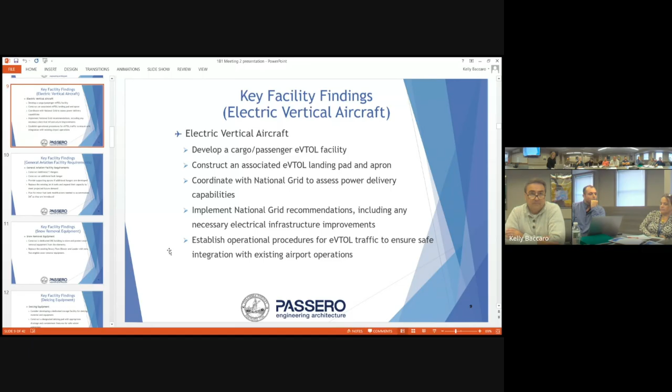Do you need me on the next screen? Yes, please, thank you. Additionally, we looked at the general aviation facility requirements. Although a forecast wasn't required for this master plan, we did a very high level forecast just to determine what type of general aviation facility would be needed in the near future.

Additionally, we talked with Ray, and it was determined that T hangars were needed, and same with box hangars, additional aprons for these T hangars, Jet A tanks, and minor fuel tank modifications needed for sustainable aviation fuels, which are also coming in the future. The sustainable aviation fuels, it's still kind of in the air as to what modifications would be needed. All the guidance provided right now just says that it would be very minor, but that's yet to come.

I just want to clarify for those who are not aviation folks: T hangars are the smaller, let's call it condominium type facilities where you have multiple tenants in one hangar. Usually they can be one-sided or they can be back to back, tail to tail, and that's called nested. A box hangar is just that — it's a bigger hangar, and that's where these larger jets would probably want to go. So just wanted to differentiate those two.

Thank you. And when we're talking about the fuel issues, currently general aviation is using 100 low lead. It still contains lead, and they're trying to get away from that. So there has been a program looking at alternative fuel supplies that still work for that general aviation, aging general aviation piston aircraft, because the piston aircraft requires or needs that lead currently. So they're trying to develop these alternative fuels to look towards the future.

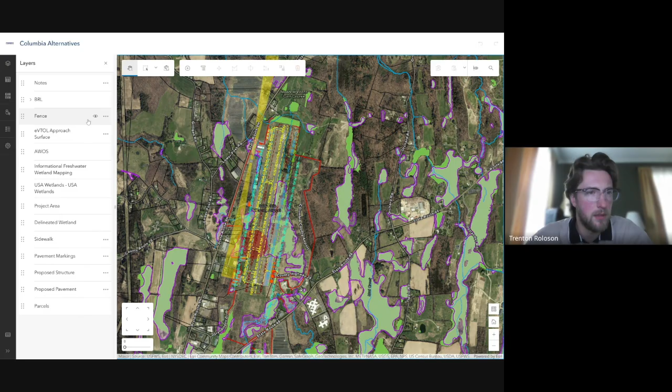There's something, there you go. We see yours. Okay, can you just explain to everybody what you're showing us before we start getting into all the alternatives?

Absolutely. So this is a web application I prepared in ArcGIS Online. Essentially, I've uploaded all the alternatives that we've drawn in for the master plan online to represent this in a more interactive map. While the static maps are really nice to look through and it's good to have them, it's cool to be able to see the environmental layers, overlay them, and turn them on and off as need be.

The nice part about this is we can actually actively edit things in real time as well. So if everyone here made a suggestion about one of these buildings, I can click on this and make adjustments to it as need be. Another thing we can do is put attributes about its information in here as well. So that's ultimately what this is.

I'll pan and move through this and flip layers on and off as need be. I've included things such as the DEC's regulatory wetlands, the U.S. Fish and Wildlife's wetland system, and wetlands that have been delineated in the nearby area, as well as everything from the alternatives. So with that, whatever you guys let me know, I'll just move around the map and flip things on and off as you request.

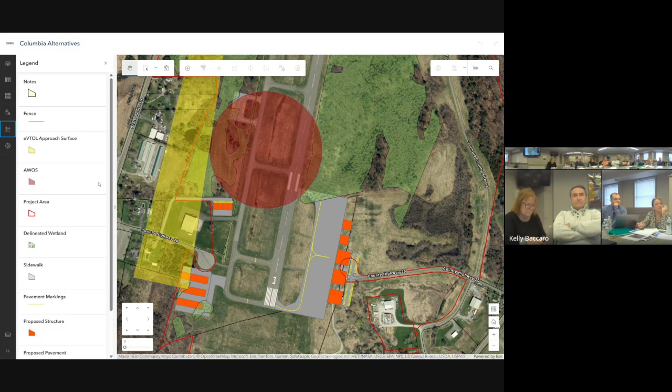So Trent, we're going to start with the T hangers. Could you just turn everything else off except the T hangers? Yes, I can flip all the other layers off. They're tied to the proposed structures, so I have to leave the other structures on as well though.

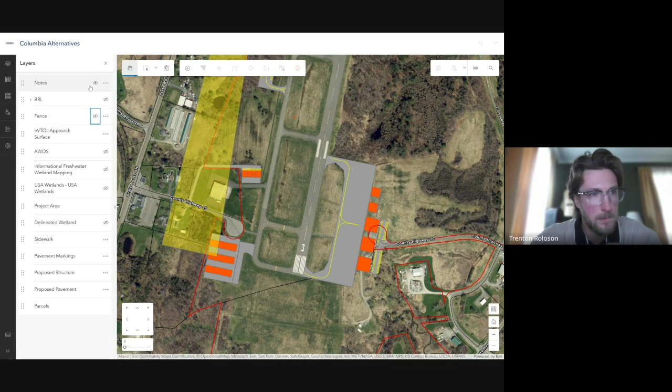What's the yellow indicate? Yeah, turn the yellow off, we're getting confused. Okay, no it's okay, that's the future airspace.

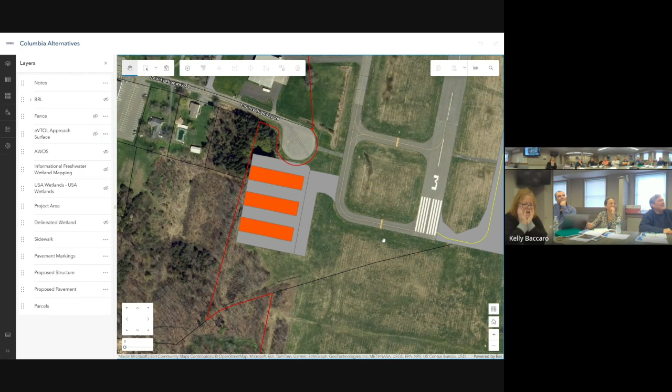Trent, could you go to the T hangers to the north? Oh, to the north, yeah absolutely.

So for the T hanger alternative, we reviewed 3 alternatives. The first was the no build. The second was this. So no build is just maintaining what you see in the picture today, the existing set of T hangers. The one to the south of that right now is under environmental review at the FAA.

We have tie downs there right now, where those other hangars are proposed, right? Currently there's no tie downs. No, the tie downs are actually located right there, you see the yellows? Yeah, okay, all right, yeah, so if I may.

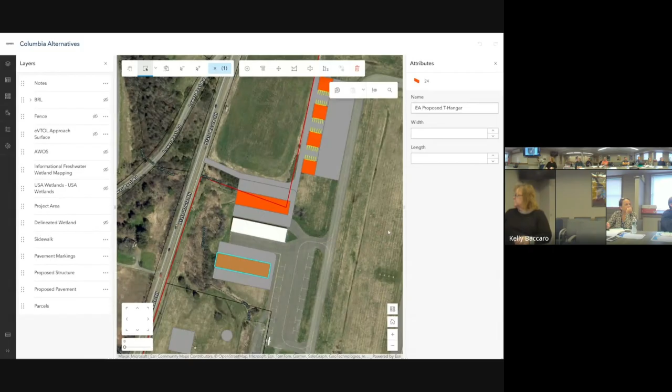So this is the existing location as far as the T hanger, so all of our tie downs are along the runway here, and we actually have more to the south as well. Just so everyone is aware, this is our current property line, but the county does own everything inside of this area, which is actually county-owned, fenced, and identified as airport property. The county also owns this piece here, but it's not designated as airport property.

That's the 5 acres we got. That's 5 acres that the county purchased several years ago, and so the county has the option of how it wants to utilize that space, whether specifically for airport use, or maybe it provides the opportunity of another non-aeronautical use adjacent to it.

So you can see with the T hanger, we wanted to be able to utilize a portion of it just from an asphalt and apron standpoint. And you're having another driveway into that there, or? We would need another driveway if we wanted to, for the next section, box hangers. So those boxes there, if we want to put anything there, we would need some sort of roadway access to get those, so we would need to do a subdivision remap and move the property line, et cetera, et cetera.

Again, this was conversation, Ray, which is like, we own both of those properties. During your analysis, if we need to move the property line, we possibly could. So this is just an idea of how it works, we control it all.

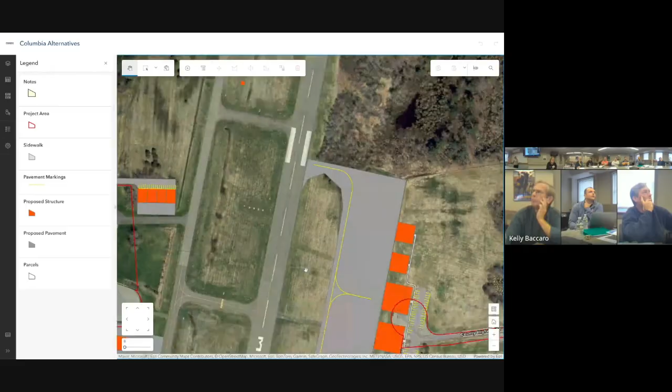And then our third alternative would be down to the south. Trent, would you pan down to the south, please? They would be adjacent to the cul-de-sac, and they would connect directly into runway 3 and the taxiway.

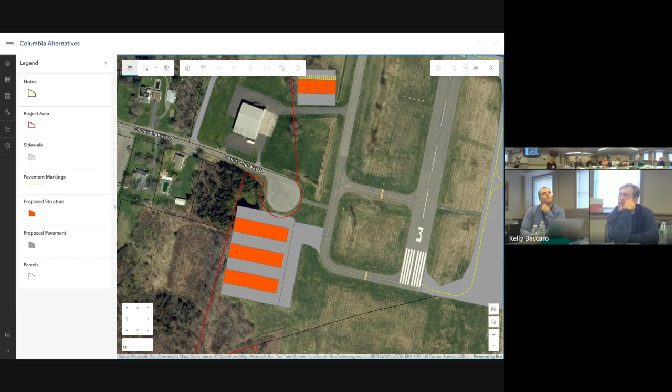Do you want to add anything else, Lisa? Currently, does that museum have access to our airport? Yes, it does. How's that? Good question.

We've had multiple discussions regarding why and how, I don't know, but they have access directly onto our taxiway. Is there a gate there? They're there for aviation purposes, is what we're told.

Well, understood, but it is not owned and controlled by the county. That parcel is a separate parcel that is privately owned, not part of the county. So normally, you would have some sort of gate, so that the county has full control of the airport property, security-wise and so forth. Now, there is a gate that goes around that area, around their property line. But from their hangar space, from the building, there's no gate between there and the taxiway.

So do they ever just come and go? All the time, they do, all the time.

Yeah, so I don't know how that took place. And there's not much of a record or documentation of how it transpired. So I don't have good answers for you there, unfortunately.

That's never been an issue with the FAA? They haven't brought it up, not that I know of, at least. They haven't.

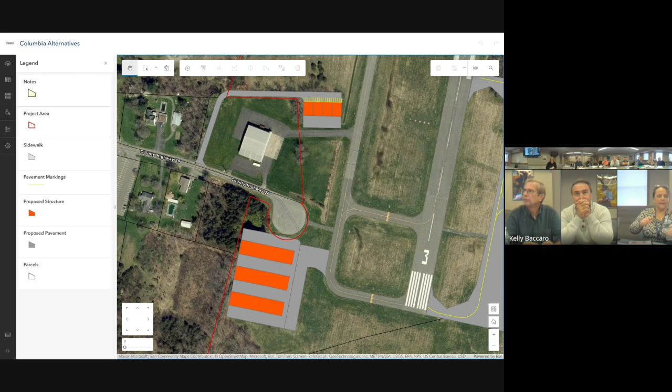Anticipated during the master plan. Oh, I'm sure, yeah, once it's brought up with the master plan, I'm sure everyone will be looking at it at that point.

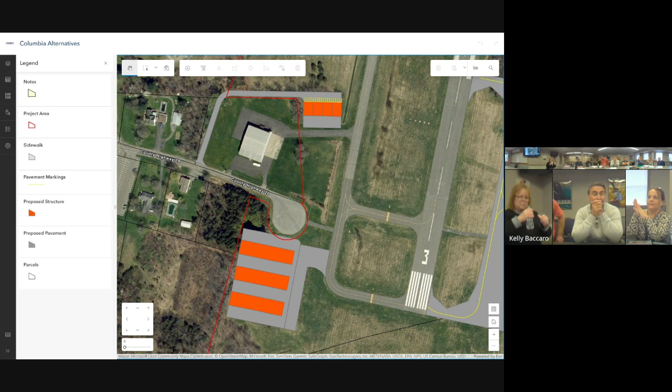Next, we looked at the box hangar locations. The first location we looked at was up to the north. Trent, if you could pan back up to the north, near the T hangars, like Lisa had previously pointed out.

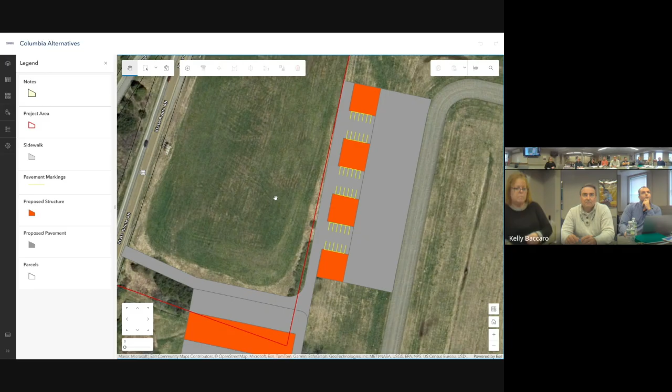For this location, we determined there would need to be access in, off Route 9H, and then there would be associated parking in between each of the box hangars. These box hangars would measure approximately 60 by 60. That was the first location.

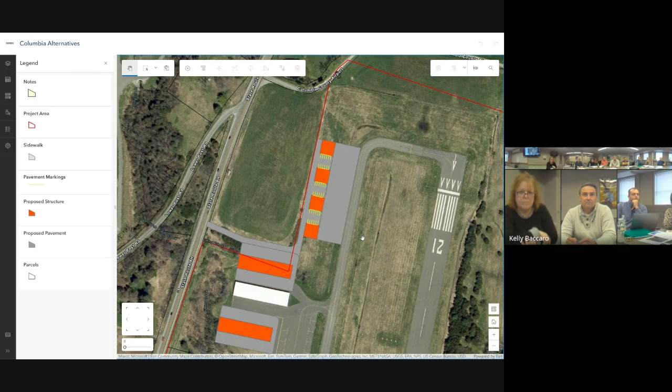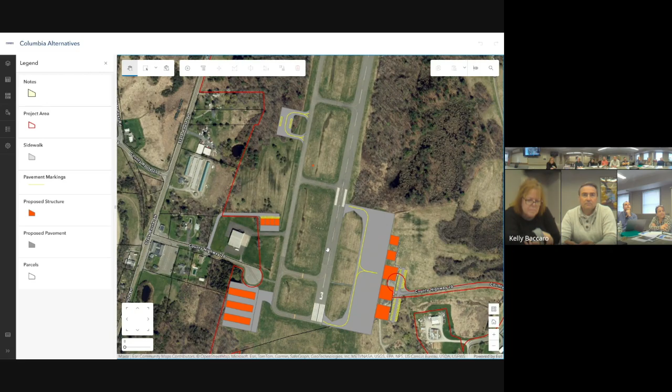The second location we came up with was down to the south, near the Aviation Museum, on the taxiway that connects into the Aviation Museum. For this alternative to come to fruition, there would have to be an access road that would come through his property, either through easement or property purchase, just to allow tenants to access those box hangars. Or if there was another way for them to park, maybe in a cul-de-sac, with a footpath, but that had its own associated problems.

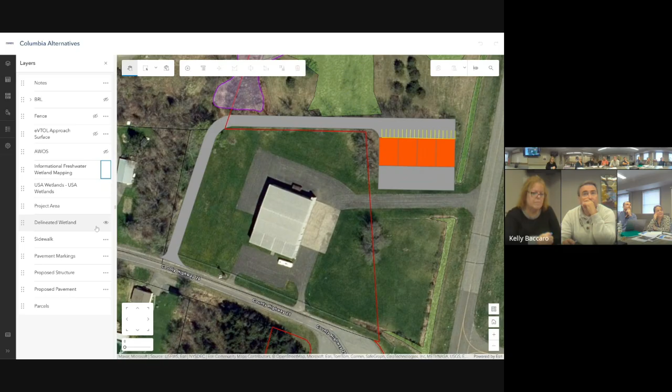There's also wetlands that impact it, yes, the ditch that we need to cross. And I think Trent's turning on the layers now. You can see the wetlands are depicted in green and purple. So right now we have it next to the wetlands, but not impacting any of them.

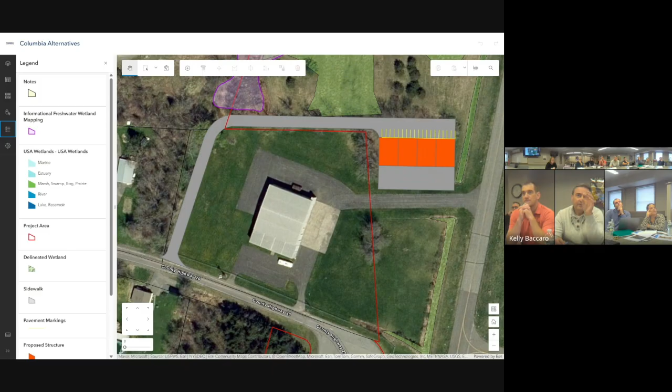So a question, if we can zoom out a little bit, just to show that field to the north, there's a little bit of a field to the north, yeah, that's perfect. Can you turn on the critical area, that big round circle? Sure.

No, because when you drive onto the site, you can see even on an aerial, there's a big field that's been mowed and maintained by the county, and it was always thought that could potentially be an area for us to develop.

But as this environmental review and master plan has been progressing, you can see there are wetlands that have been mapped that unfortunately take up a good portion of that field. And on top of that was the introduction of the critical area as well.

Is it wet? It is wet. Okay, well sometimes they have stuff marked. No, our folks, my understanding is in the past they buried a tractor there once or twice while mowing, but they didn't leave it there. They pulled it out, but they make a point of trying to hit that particular area as well as others during drier periods, because it's wet.

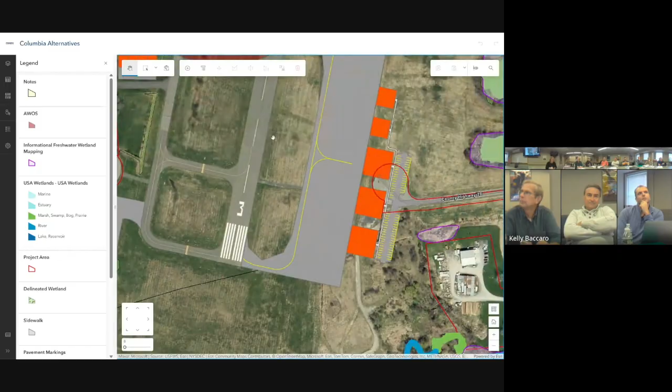The third location we identified was down to the southeast, which I believe is the Kitschy Farms area. There we have two 80 by 80 bulk hangars and three 120 by 120 bulk hangars, and the associated parking that would go along with it. This eliminates the cul-de-sac, but it does require another subdivision line realignment as well.

So if your direction to us is you like this one but really want to see how many 120 by 120s we can get in here - if you're asking, the space between the buildings is to meet NFPA code, National Fire Protection Association. Otherwise if we put them all together we get into big issues with sprinklers. That's not to say we don't need sprinklers on here, that's the architect's question. But the water tower is on this side of the facility as well, so we're just trying to think what makes sense.

Also, the Hudson Valley is in need of hangars for business jets, that's a fact. There are a couple of organizations out there who want to come in, invest, and build big hangars on your airport. This might be an opportunity for you to attract somebody like that, keeping them on this side, completely separate from everybody else.

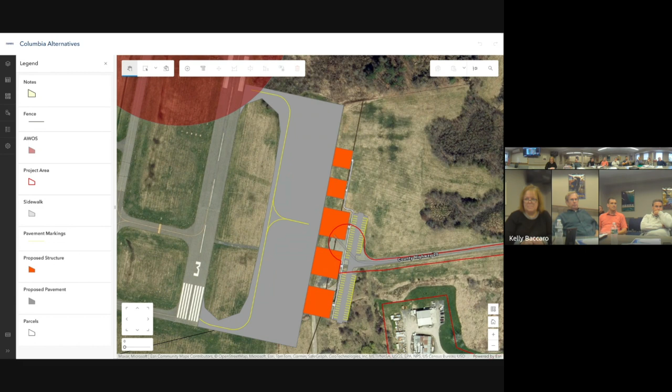Now, you brought up before that 5-acre parcel out on the 9H side that was outside of the airport. Try to go to the north, please. I just wanted to use this, is this right now existing outside? You mentioned this needed a line adjustment too. So the majority of it, to the north of the cul-de-sac, is all located within the airport. Okay, so that wouldn't have been potential.

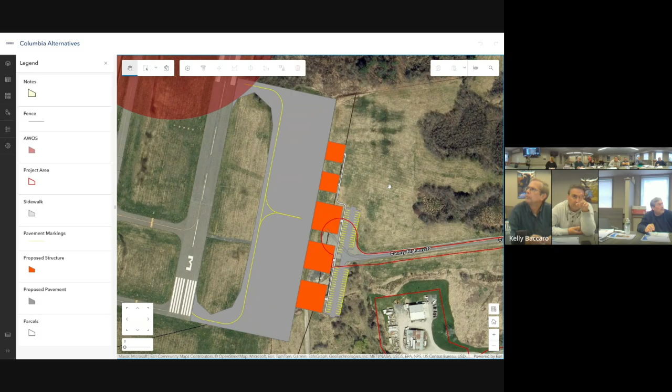Yeah, it's the southerly part, as we're heading towards the old kitchen barn. Is that basically where those wells are that everybody wants? No, no, those wells are much further to the south there.

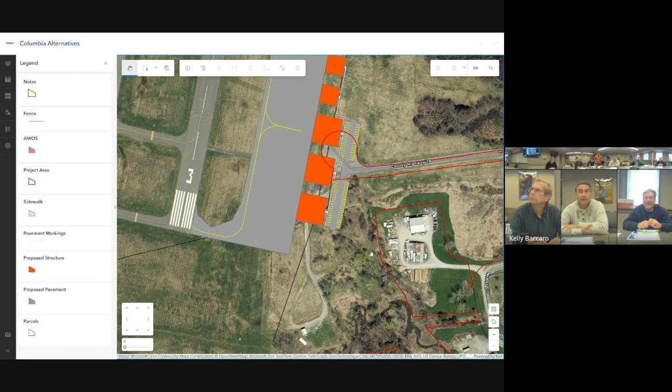If you look at the little white area, there's a dirt roadway right there. That's actually where the sewer plant used to be and now our pump station is. But if you drive out in that entire area, you'll see the field that's there.

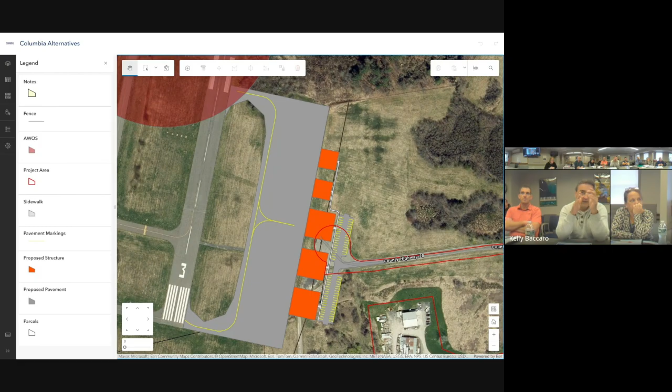Our thought was, having the cul-de-sac in that area right now, we understand why it was put there, because it used to be a through road, so a cul-de-sac needed to be developed so that traffic and emergency vehicles could turn around. But if we do something a little different, either move that, get rid of the cul-de-sac, or reconfigure it, there's a lot of developable land.

And again, I can tell you, I did meet with an investor that had initially identified interest in the airport as far as developing a bulk hangar. They were looking to potentially partner together with Richmore.

Of the various locations we generally considered for a bulk hangar, this was the preferred spot because it's away from the rest of the operation. I can see that being attractive. I didn't know if it would be a plus or a minus.

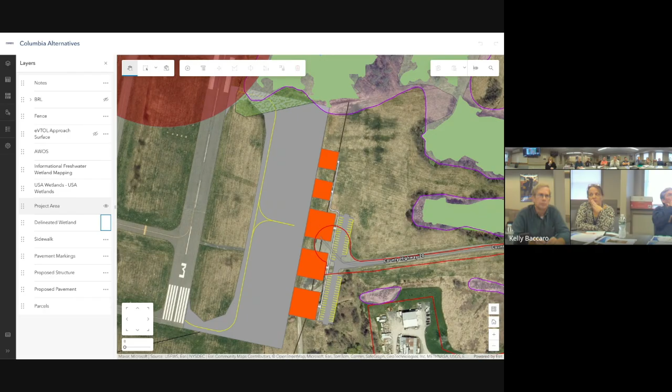There's still a lot of developable land, as you can tell, but we didn't go too far further south because we're trying to minimize wetland impact, and we all know that's going to cost a lot of money. But if you want us to look at other alternatives to get more development in this area while still minimizing wetland impact, we can do that.

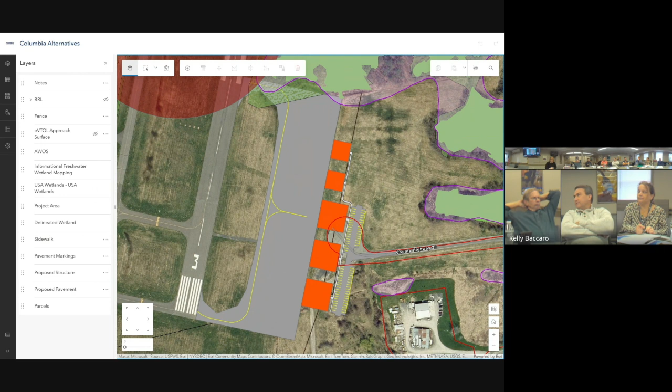I like what you've done, but when we're looking at a bulk hangar, I'm wondering at 14,000 square feet—although it seems big, for aircraft hangars it really isn't. I know what we were looking at previously was 30,000 square feet. So it might make sense to look at, instead of three 14,000 square foot hangars, maybe two 30,000 square foot ones in that area.

Once we start going bigger, we go taller, and we have to go further away from the runway. So if you want us to look at 30,000 square feet, see what we can fit and how we can configure it, we can certainly do that. I think I would.

That would allow multiple aircraft, a larger business aircraft, to be stored. That seemed to be the sweet spot even when Richmond was looking at what they wanted to do. I understand there's an impact on overall land use, having to come further away from the runway and so forth, but I'd tend to think maybe a pair of 30,000 square footers there, and then seeing if we can still have some of the smaller bulk hangars too. Even with the smaller bulk hangars, you could potentially run a small business out of one, whether aviation related like avionics or something else, because there aren't enough avionics shops within the Hudson Valley.

Steve, if we're at 30,000 square feet, does that automatically trigger fire protection requirements? There are two components to it: one is the size of the building, and the second is the amount of fuel stored. Typically you have to stay in the 12 to 14 thousand square foot range to avoid that, and then it comes down to the size of the fuel tanks in the planes.

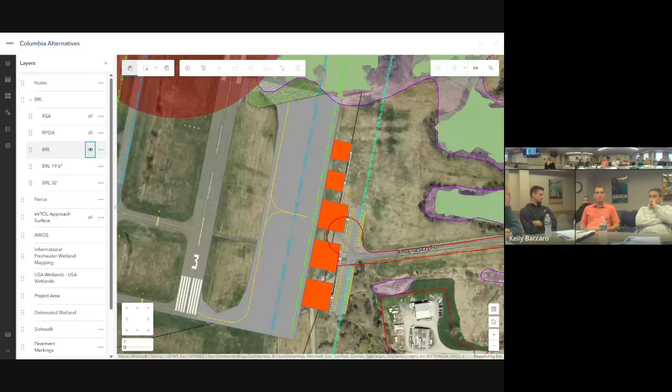I'm not positive if that could be a policy matter, like there are certain things in the building code where you can say we take responsibility and will have no more than 49 persons in this room, so we don't need to comply otherwise. I think Matt, you came across that in the past, and they said it's not a waivable thing—that was one specific municipality.

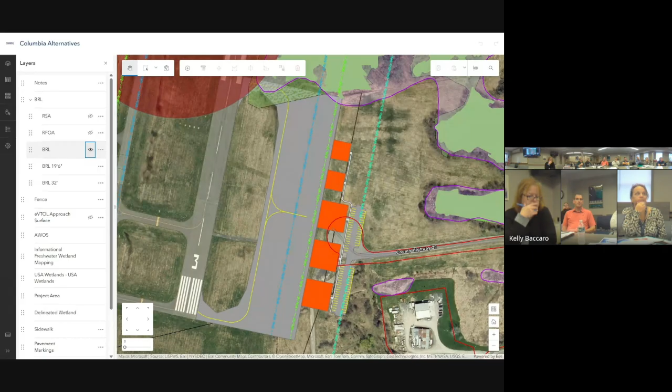Frank, can you zoom out just a hair if you don't mind? Perfect, right there.

So to that end, I recognize the concern—just so everyone's aware, both the committee and as Matt and Zach and I have discussed, we are currently in the midst of designing a water storage tank for this area of the property. It'll be a 400,000 gallon water storage tank to feed the entire Commerce Park, including a transmission line that comes down into this intersection, and there's also sewer in that general proximity. So running and extending water from that point out to these locations to provide fire protection becomes achievable, versus the opposite side of the airport where it's more problematic. That's why the larger hangars make sense here.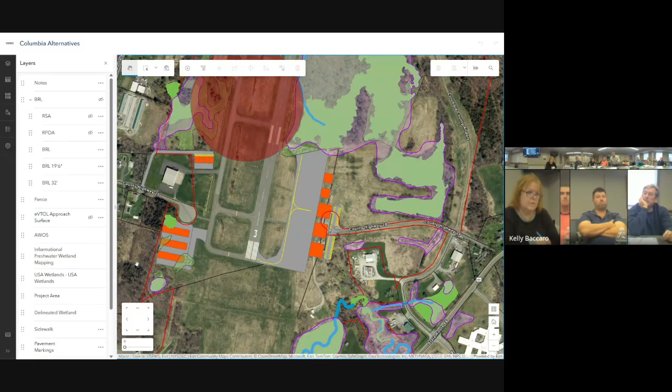That was a question—is the fire suppression all water, or is it foam or something else? Inside, former types of foam have kind of been outlawed. There are clean foams, other clean agents, and water-based systems. It kind of depends on the types of aircraft and the amount of fuel.

And then you would say if it's below a certain square footage you want to view, then you avoid that altogether. So I don't know economically, I get what we're trying to attract, but yeah.

Is it easier to find a developer with a lot of money and a bigger project, or smaller ones, where they might put a smaller one?

Well, I guess my point is if we're going to go for a larger hangar, and by all means this is an opinion, not a statement, I would tend to think that this would be the location. The location I like, so yes. I'm just thinking if we're planning, we should plan for the larger ones.

And then if you find a developer that wants a smaller one, they can do that too. Okay, yeah, I mean I think you're more or less marketing leasable space.

That's right, yeah. We have 5 acres available for whatever you could need, this size building, whatever you can pack in there. Oh, you want 1 acre? Okay, exactly, yeah, that's a good point. You don't want to tie their hands to anything.

So I would plan for the more complicated option, and then see what the market brings us. But at least potentially we would have the ability of building those larger hangars. Okay, yeah, I get that idea.

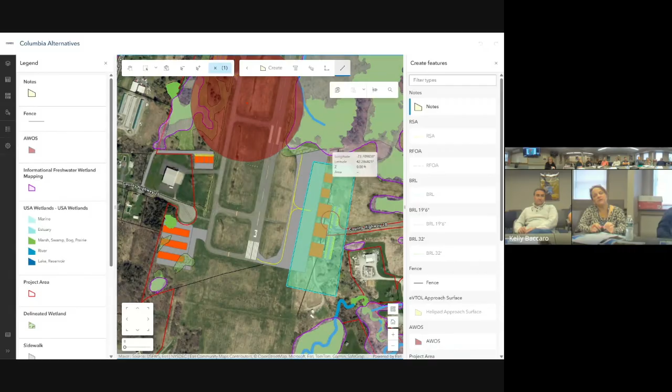Well, we may not be able to do that with the FAA. So that's technically considered a through-the-fence operation. If you're collecting fair market value from a commercial standpoint, it's okay. But if you're not collecting fair market value, it's a no-no.

That's the issue with the museum, because they basically have a through-the-fence operation, and we, as the county, are not being compensated. As the airport operator, we are not being compensated for that.

Yes, because, for instance, and again correct me if I'm wrong, the apron areas, when it comes time for paving and so forth, that would be eligible for funding as far as that goes. So that's one of the reasons for getting those portions of it into the airport property.

So it's just a matter of us doing a subdivision to move some of that land in, I'm sure, since we're dealing with the FAA, it's not simple. That's my point, I can understand how we can do it in town, but county is different. From a county perspective, we'll do it, and then we just need to go to the town, because it's not a land purchase, it's just a land transfer.

Right, so it's more of us just letting them know we would be expanding our FAA footprint kind of, so here's the survey done by a surveyor, here's the deed that it was recorded in the county's records. I'm in the process of doing this right now. There's not really another specific airport-related FAA land lease thing in this area.

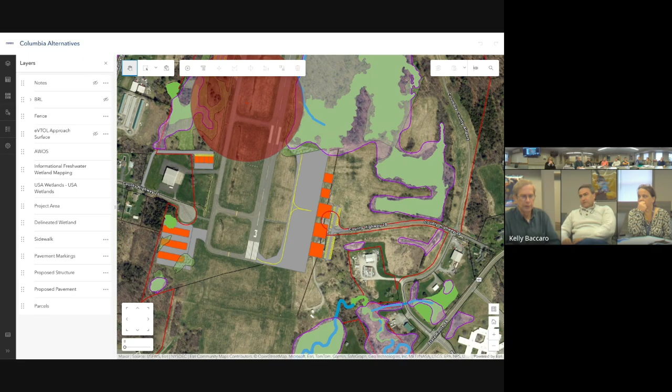In its zoning code, if we just expand within that footprint, we would have to have those discussions with the town to modify that zone to incorporate that. That occurs at the town board level.

I didn't know if there was a struggle with the FAA trying to get the footprint enlarged. I think it's more procedural in this case, more of a struggle to release lands. Increasing is usually the lighter lift; it's the other direction that becomes more problematic. So it's more procedural than anything, and I think the more important item is the zoning item, the way that it is dealt with at the local level.

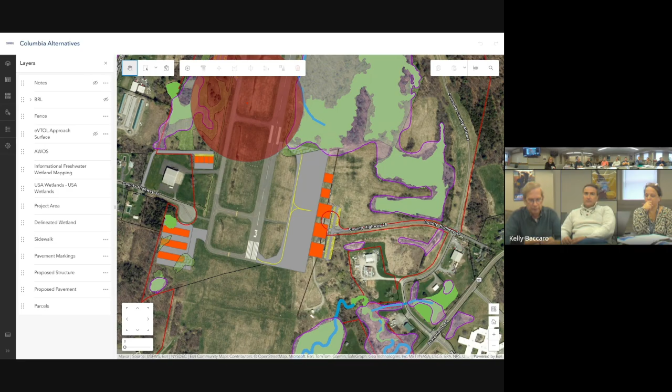Okay. The next alternative that we looked at was for the Jet A tank.

Oh, can we go back a second? I'm sorry, the 60 by 60 hangars - do you think those are beneficial? The only reason I'm asking is, Sean, can you go to the north please? These 60 by 60s where we would need an access road off of 9H - the largest we can get is 60 by 60 in clear airspace. Anything bigger than that, I don't have room for. I'm not in favor of those bulk hangars in that particular area.

I'm just trying to think of a small hangar that is an aviation shop down in Dutchess County. I'm trying to remember what runway it's sitting off of. Citation Drive - is it Aero Mechanics, one maybe? That little green building? Yeah, Citation Drive, actually it's the one next to their fire apparatus building. I thought those were all T-hangars. No, there's a private operation, an avionics shop running out of there.

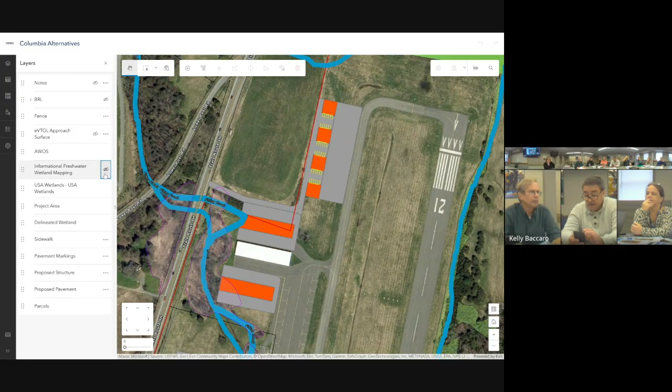So if we were going to do something there, Ray, why wouldn't we just use more of the 5 acre piece? We could potentially do that. Are you trying to save some of that for another business that would front the road? Yeah, I've always pictured that there might be something there, but I was thinking of that non-aviation use - is it a possibility for a restaurant or something to that effect? That's the only reason I haven't looked at developing that area for aviation use, because it's not within the airport property, so it provides us more flexibility if some other private entity comes in. I honestly don't know what that private entity is. Right, but I didn't want to necessarily expand into that area.

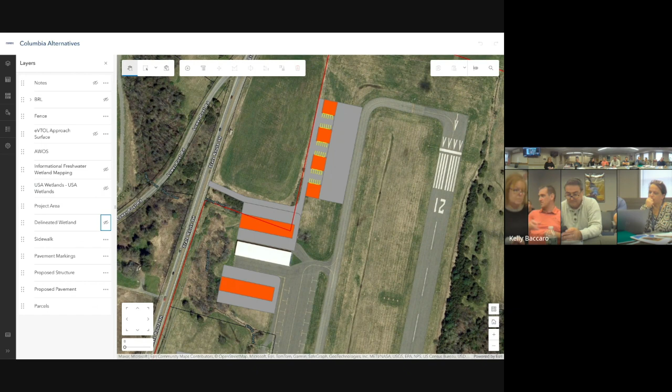I just don't know how much more of a presentation there is, so if you want us to look at making these bigger and pushing them back into the land, we can give you a picture of what that looks like. Which ones are those? The ones we're looking at right now to the north, but then you'd be encompassing more of that 5 acre parcel.

Yeah, no, we have the BRL line on there. What was it, 30? Trent, what's the green line? Is it 19 feet? The green is 32 feet, and the blue here is 19 feet 6 inches. I'm not exactly sure what this one was, so I don't think there's as much of a restriction as it seems.

The 40,000 square foot hangars have a peak height of 45, 46 feet. Obviously grade may go up, but it can only go up by 1%. Also, if you're bringing in a longer aircraft, you need to leave that space in front of the hangar for the apron. You're going to have that setback regardless.

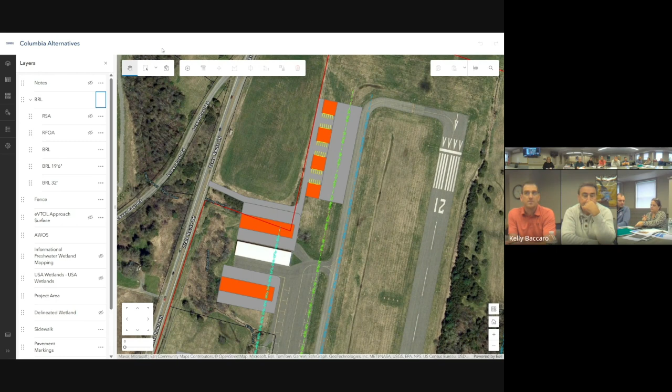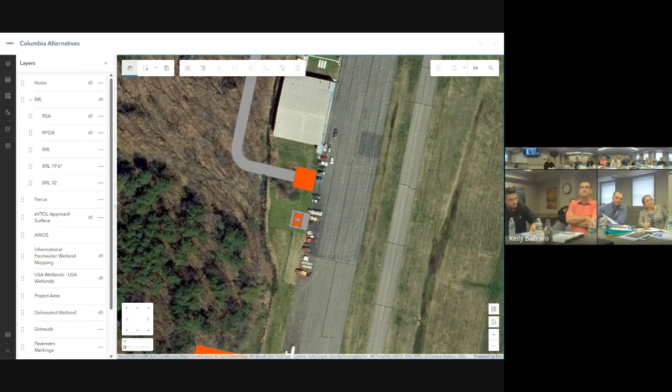We also looked at the Jet A tank. Trent, do you want to go down south? From my understanding, this was a previous location that Zach had worked with Ray on previously. That's how we came up with this location. One of the problems we were running into, though, was it had been mentioned that

they didn't want Jet A drop-offs to be on the apron. They wanted their own private access road to the back of it. Additionally, wetlands were also kind of a hindrance on this location as well, so we're still vetting it and working through alternatives.

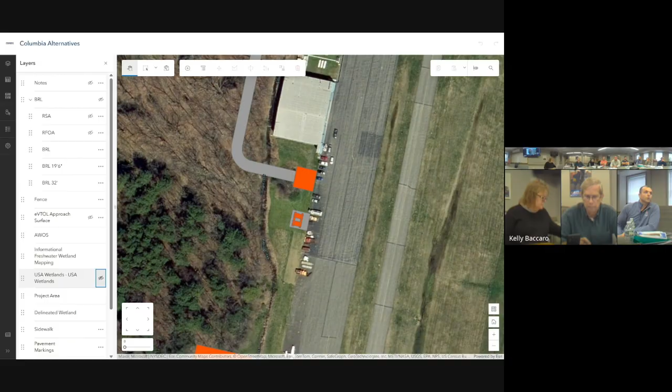So one of the reasons for looking at this—Trent, can you zoom out just a hair so I can show the current location? Thank you. So currently we have the Jet A in this location here, in between the two. The Jet A fuel tanks are here, with a dispensing location at the apron edge.

One of the problems right now is everyone coming into the airport uses this access way, coming to the south, but then all the aircraft always end up in this space here as far as the main apron, so it gets very congested, especially on weekends.

So the thought process was, by providing the Jet A further to the south—and this area of the apron is very underutilized—to provide the ability for jet aircraft to be fueled and then parked in this area. This area does need to be cleaned up, but it does provide parking for that jet aircraft and gets it away from that congested area, because we also have general aviation aircraft there.

That come off the runway and then go to their fueling station, which is located right here. So again, this whole area gets very congested, so we just wanted to move that jet aircraft a little further to the south.

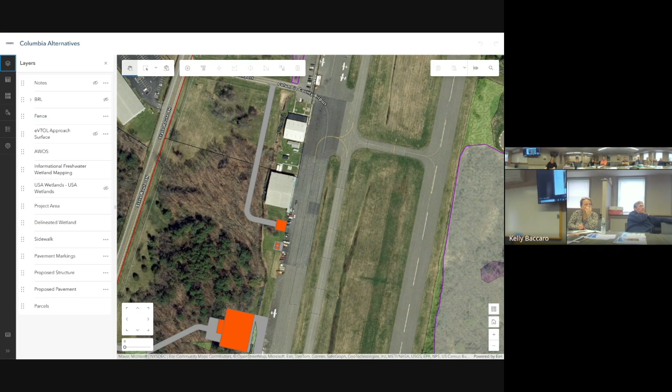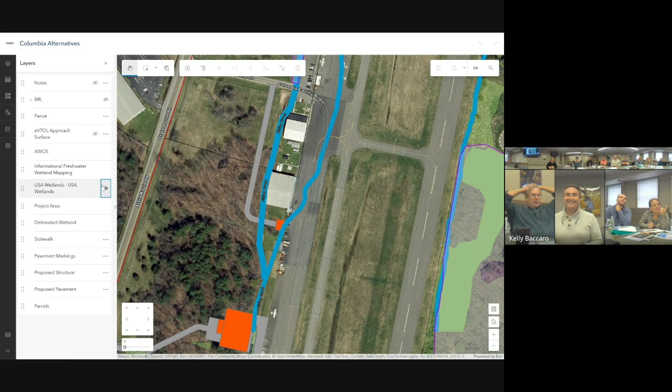And that access road behind it is not in wetlands or anything there? Oh, man, yes, that one. Okay, so we're still trying to get permits from the culvert. The smaller area you see there, with the access road coming off behind the building—off on the access road—this would be your snow removal building.

And that's under environmental review right now, so this whole project is under environmental review right now. And then this building—scoot up just a touch to the north. There you go, thank you.

This would be a large bulk hangar for your FBO, your current FBO, with an access road coming through the gate, back through there. This is all wetlands—all the treed area is wetlands. So again, that's under environmental review right now, trying to get you to development while minimizing the environmental impacts.

But one of the benefits of that access road is it provides us with access to our snow removal building, and again removes vehicular congestion off the apron, because right now anyone going to that southerly hangar by vehicle has to come out, go inside the fenced area, down the apron, and actually park by that building. So by providing the road, one long-term thought was whether it provides the ability of parking for their staff along the edge of the roadway, and then creating a new entrance into the space through a fence line, so they don't have to actually enter onto the apron.

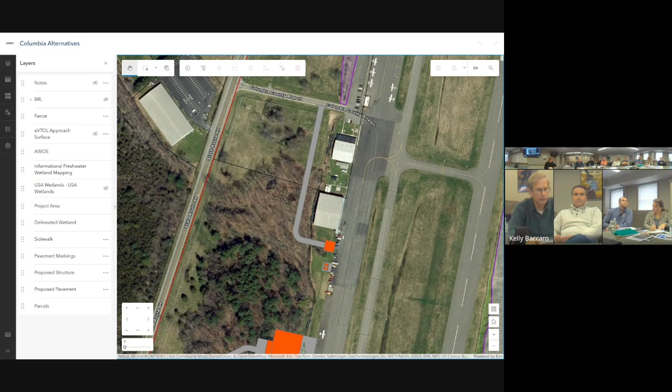I first thought it had something to do with the reason. So your beacon is located in this area right now - that's that structure right there that Trent's pointing to. So if we were to do this project, I think your beacon was just installed in 2020.

Either when eVTOL sort of really comes to fruition, you relocate at that point, which would probably be on your dime, or you relocate at the point of useful life.

We thought that this could be an opportunity or a prime location. As we discussed, this eVTOL is supposed to start as cargo and then move to passengers. Seeing as you are really within reach of New York City, I could see how it could be used for moving passengers. So the yellow area is the airspace for the eVTOL. If we wanted simultaneous operations at the airport, they would be flying their own airspace as opposed to the runway - flying parallel, so it's not really as much of an issue.

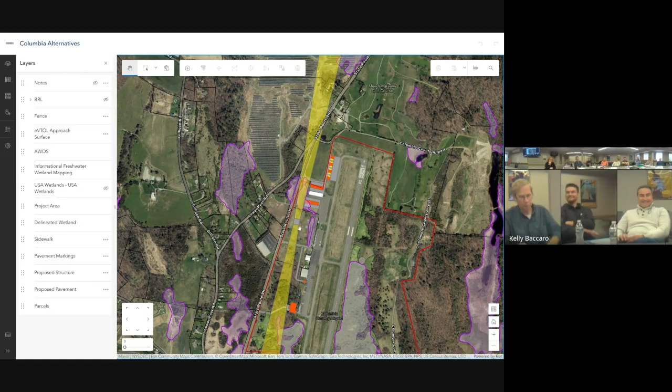Get one on the roof of this place that would avoid me from having to get through the 9H66. Yeah, right, you could come on down. That would solve your roof problem. See if we can get it funded.

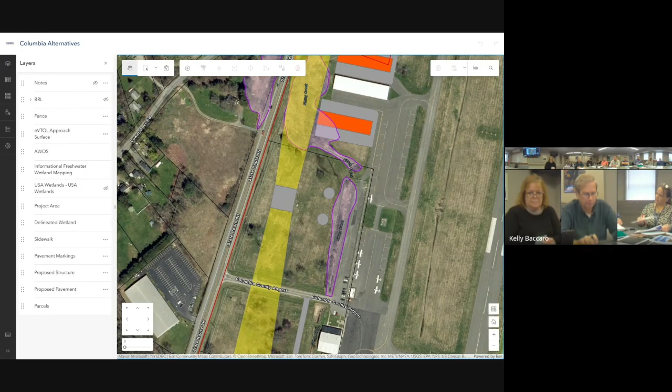Okay, so de-icing. De-icing? Down here, turn some things off.

So you'll see that the de-icing was inside the critical area. However, the critical area has height on it, and an aircraft in there for the temporary time would be in there for the de-icing operation. If you were to store your de-icing equipment down in this area, it would need to be stored outside of the critical area.

Runway 3 being your primary runway end is why we put it down closer here, so you wouldn't have void times.

But this still needs to be vetted a little further. We have not had an opportunity to talk with the engineers about timings of sewer and all that good stuff. That's available tomorrow.

So that was the only alternative, unless you really wanted to put it all right at the 3 end where the other T fingers were shown, off the cul-de-sac. Go a little south to the cul-de-sac. I mean, you could put it in that area as well.

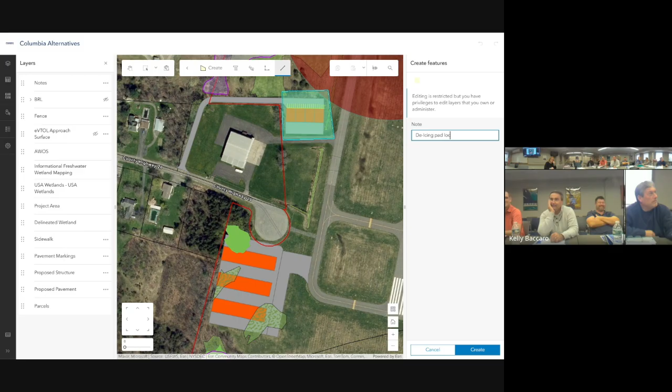Yeah, I'm sure he's gonna want me to -- exactly. If I drop the $70 in sewer that he pays, then maybe he... Yeah, right, I'll let you know. In arrears. I understand.

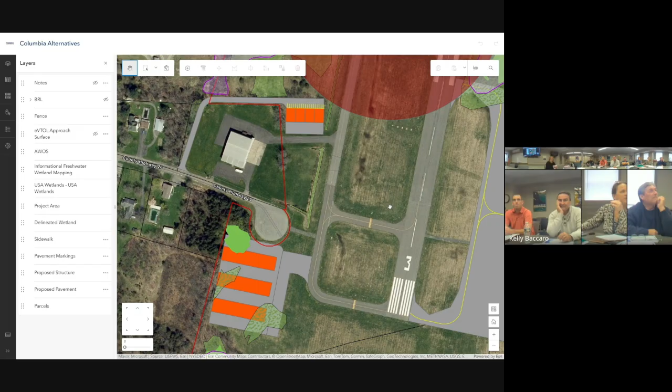So Trent, since I think you can kind of do this real time, if you were to take that footprint of the de-icing apron, can you just copy it? Let me give it a run. Of course, we would need to reconfigure it slightly because of the alignment.

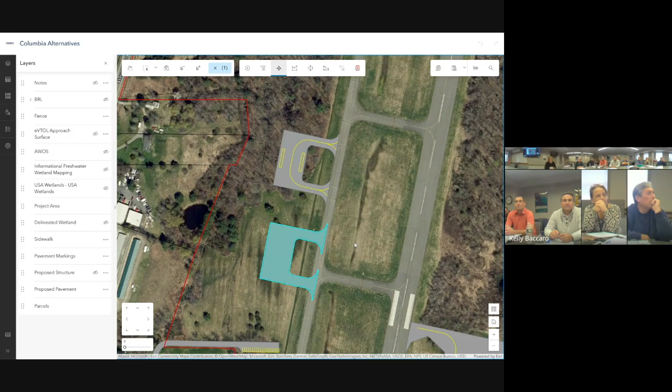Now, its proximity off of the taxiway, is that for wingspan clearances? Yeah, that's what I thought. This is overall.

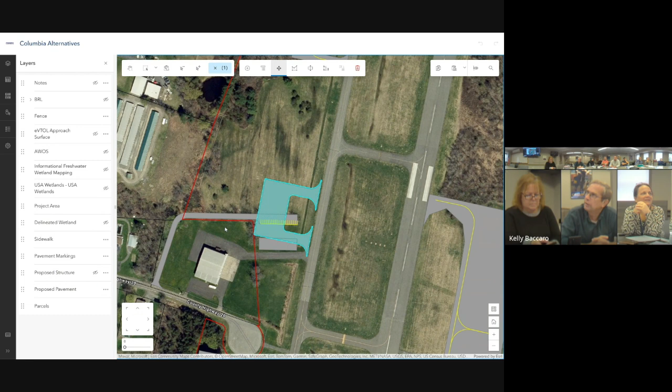Figure out how to rotate this thing. Well, that's okay, just move it. That's just good enough, gives you an idea of the footprint. All right, we would need to realign it. Can you turn the wetlands back on again? And then turn the critical area on.

Minimize -- well, you said that was within the... it could be, but actually you're clear now, so better. All right, I would say that would probably be more conducive, more realistic. Trent, could you just mark that as preferred? Yep, and then we'll clean that up.

I think the last alternative is just the relocation of the rotating beacon, which we previously mentioned. If the eVTOL area comes to fruition, that rotating beacon will need to be relocated. The spot we chose for relocation was in the northeast section of the airport, right where that orange block is.

If the beacon were to be relocated there, the trees surrounding it may need to be trimmed as well -- that's still being vetted -- as well as access, electric access. But that relocation is all contingent on having the eVTOL, correct.

Do you know what the useful life of the beacon is, offhand? I think it's 20. Is it that long? I don't know if I've ever looked, I was thinking 10. It'd just be interesting from a planning stage, the timing of eVTOL and us moving the beacon, whether it's on our dime or potentially someone else's. We'll get you an answer for that one.

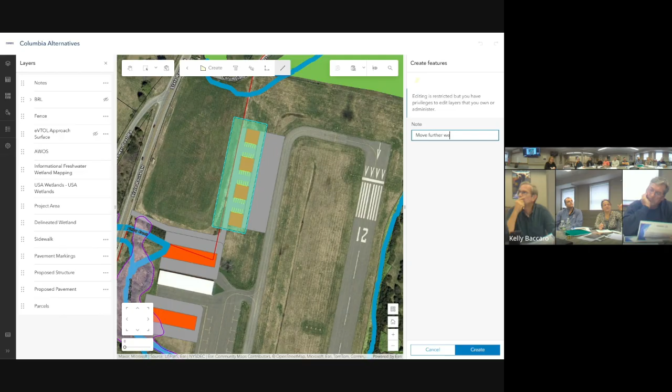Any comments on the T hangars that are being shown right now? Any comments on the T hangars shown to the south? No, actually, I like those to the south as well.

Okay, reconfigure. It did reconfigure them though, for the development of the big bulk hangar development. Got it. That's on the east side, yes. Trent, you got that covered.

Okay, so we skip the next one. So obviously it helped, but it didn't give us what I was kind of hoping we were gonna walk out of with. Okay, well, here it is, but that's okay.

He's got a check. We will reconfigure some of these and then we'll get back together with you, and show you some ideas. Then we can meet just as the group, as far as the committee, and walk through that process a little further.

If we had this updated that we could blow up and play with, just in a PDF or something, that'd be helpful for just us. No, absolutely.

Then once we have all that, we'll be finalizing the environmental overview. Then we move into the financial plan, and this is something that I would like to look at here. Is there a local share cap that we try to stick to on an annual basis?

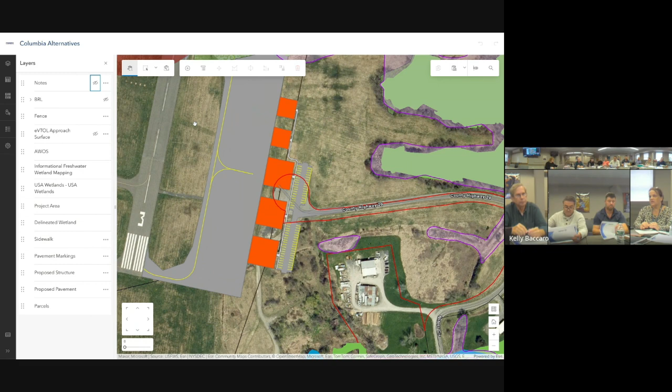So what we do after we finish with all the alternatives, we then start putting together your 20-year airport capital improvement plan, which then Matt and Zach will use going forward as a reference point.

But as I start putting it together, I try to make sure that the local share does not exceed what the county tries to keep your budget within. So, and I don't need an answer today, but Ray, if you could get back to us.

Yes, so what I can do is I can get together with, I'll start with Jim Bragg, the supervisor, and I can at least discuss where we currently stand and what our expenditures have already been. You've laid that out for 5 years and a number of projects fall in there.

And I just want to check with both him and PJ whether they feel that that's sustainable or not, and then adjust it accordingly. And then that way I'll bring it to Public Works, have a brief discussion and get back to you as far as that goes. That's fine.

I don't want to over commit ourselves. Yeah, no, I know we've been very aggressive recently as far as the airport activity because the funding's been there, I think, if you based it on where we've been.

And just stretched it out, but yeah, I'll get together with them. I don't want to speak for them, I'd rather get their input.

I'm hoping that a lot of these projects are gonna generate revenue. Well, that's the intent. Honestly, that is the intent, so that way we better utilize the asset for the different reasons, the asset that we have. And it is an asset.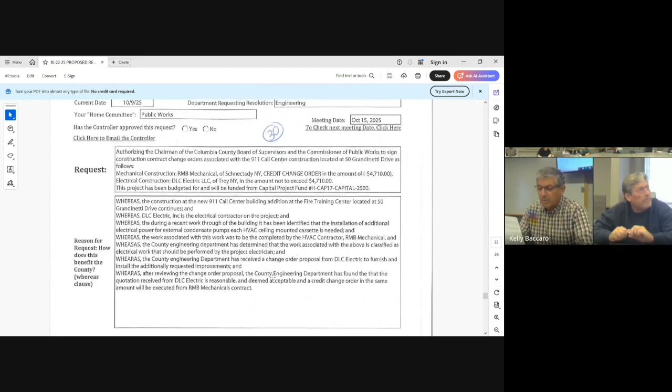Second. Second. Motion and a second, all in favor? Aye. Opposed? Carried. Resolution number 30, authorizing the chairman of the Columbia County Board of Supervisors.

I'll move it. We have a motion and a second, all in favor? Aye. Opposed? Carried.

Resolution number 31, requested authorizing chairman and the Commissioner of Public Works to execute all necessary project initiation documents and agreements. I wasn't gonna read all of that. I know.

Thank you. Sit back with your feet up. That's right, you know. We have a motion and a second, all in favor? Aye. Opposed? Carried. Resolution number 32, authorization for facilities.

Move it. Second. We have a motion and a second, all in favor? Aye. Opposed? Carried. Finance, resolution number 33, resolution approving the premium equivalent rates for the 2026 Columbia County Administrative Services Only Insurance Program.

I'll move it. We have a motion, second. Motion and second, all in favor? Aye. This is for both health and...

Okay, both. We have a motion, all in favor? Aye, I think we had a vote. Carried. Resolution number 34, authorization for voluntary collection agreement with Avalara Vacation Rental Network, Inc.

Has to do with the Airbnbs, right? Yeah, okay. Move it. Second. Motion and second, all in favor? Aye. Opposed? Carried. Resolution number 35, authorization to approve a contract for a countywide cost allocation plan.